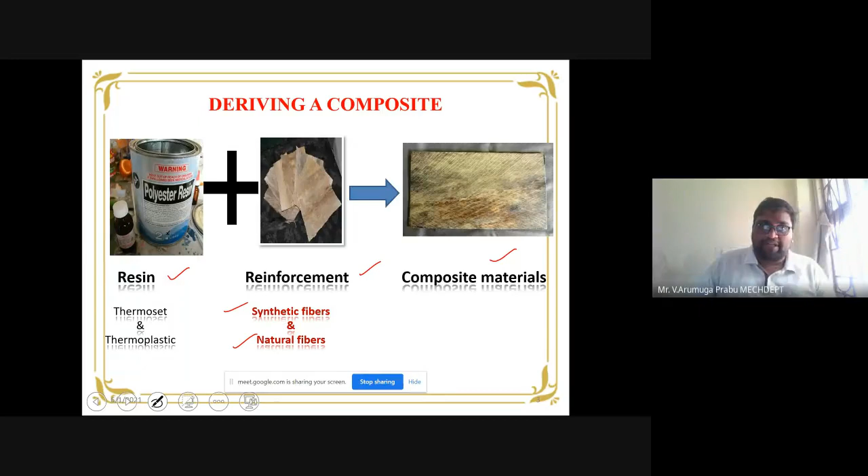So when we combine these two together, the output is your composite material, which should be in a plate form or whatever product form, according to the mold we are going to use and according to the application where we need it. So this is a brief introduction about how we derive composites.

Followed by that, the next one I would like to discuss with you is hybrid composites. So why do we go for hybrid composites? Since we all know composite is one or more, in the sense matrix and reinforcement. Now, as technology changes, as the day progresses, and as more research is evolving, the usage of hybrid composites comes into picture. What are hybrid composites? Here you are going to use two or more reinforcements instead of one reinforcement and one matrix. We go for using two reinforcements.

On the other hand, two matrices is not at all possible. There isn't enough research because of its chemical properties. Two matrices is a difficult task. But on the other hand, our research team focuses on mixing fillers with the matrix in such a way that we are able to produce hybrid composites. The reason is: one matrix is there, one filler is there, and another one, the reinforcement, is there. So this is about your hybrid composites.

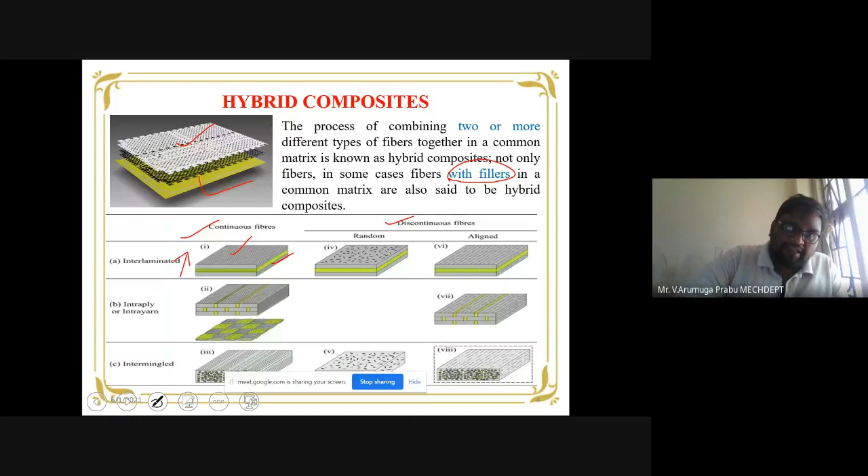In the case of the second type, intraply, you see the yellow color scattered here and there. If you see, you are able to notice the yellow color here and there. So that's your next type of arrangement making the hybrid composite. See the next picture, it should be well understood.

Then the third one is the intermingled. If you notice the intermingled type, what is happening is the two types of fibers are scatteredly arranged, they are intermingled together like this. So this is the way the continuous fibers are arranged.

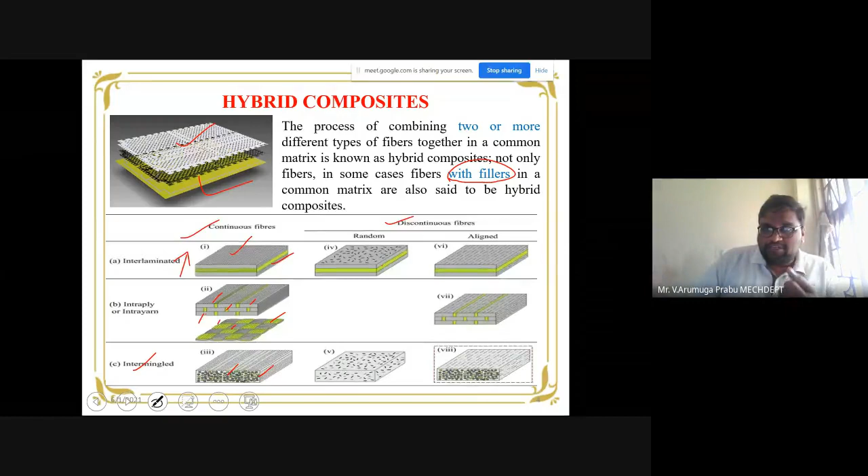In such a manner, the discontinuous fibers are arranged either in a random way or aligned way as shown in the pictures. So this is a brief introduction about hybrid composites, how we can prepare hybrid composites in different arrangements, as clearly shown in the pictures.

Now, why do we need hybrid composites? Of course this question will arise in all our minds. Automatically composites will reach the peak, and more sectors are using composites. Why specifically do we go for composites, and why do we go for fillers? It gives the answers for that also - why we go for using fillers for making some advanced, interesting composites.

The first reason is a general thing, the cost factor. High material cost is there. We go for merging one or more fibers, or fiber with filler, or matrix with filler. This automatically gives some excellent output properties, enhancement in properties. If you use filler as a material which is available by nature itself, there is no cost involved. In such a way, instead of spending high material cost, with very low cost we are able to produce some good, interesting, advanced composites.

That's the first reason. The second reason is the low installation cost. There is no special setup you are going to introduce for making your hybrid composites, so the installation is zero ultimately. That's another advantage where we go for the hybrid composite.

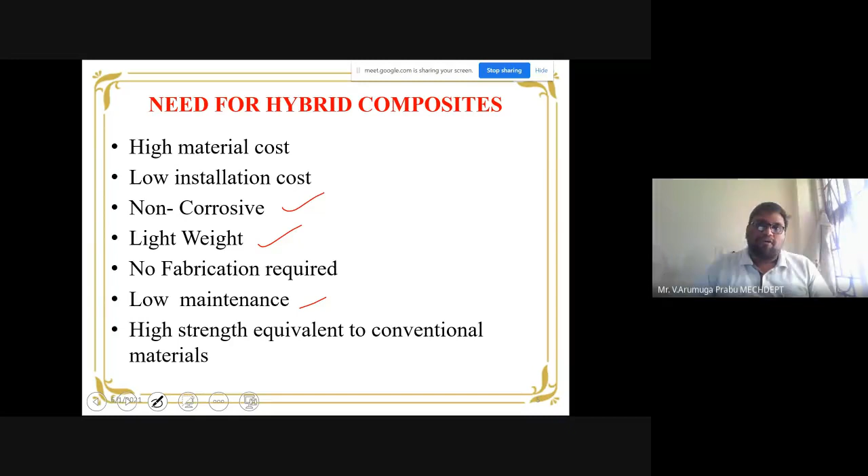And the ultimate highlighting point based on which we go for the hybrid composite is the high strength equivalent to our existing conventional materials. So these are all the major reasons based on which we go for the usage of hybrid composites. Let me move on to the discussion about a few examples.

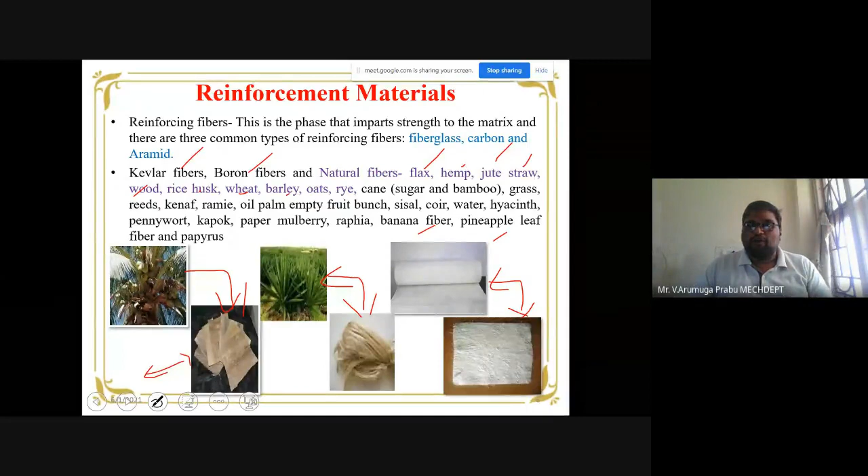So this is about the various reinforcement and matrix materials we are using in manufacturing advanced composites. Now, the next one I am going to focus on is about the major fillers which we are going to use to produce our advanced composite materials.

And this rice husk is the waste produced during the processing of rice. And the fly ash, of course, you all are aware about fly ash. In all the industries, while burning, fly ash is generated in more number.

Then the third one is the red mud. This is an interesting waste. Myself and my professor Udaykumar, we completed one sponsored project based on this red mud utilization only. That is, what is this red mud? It is an exclusive waste generated during the production of aluminum, that is, it is the waste coming out from the aluminum industry.

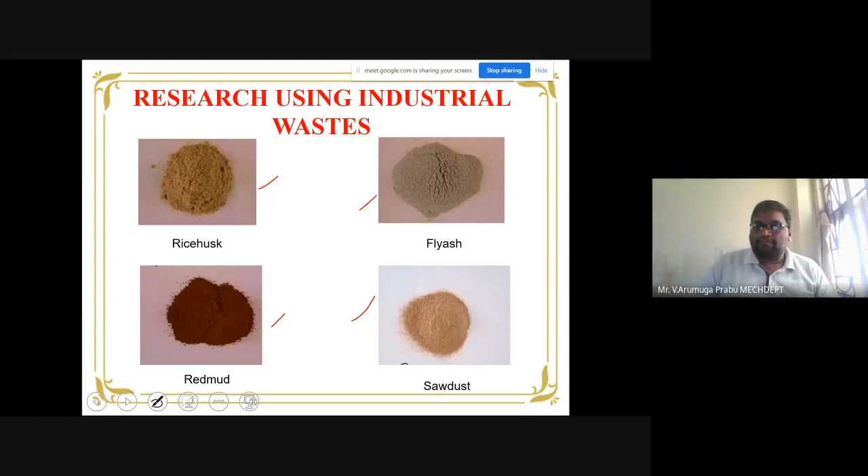So this waste we are using as a filler, that is, we are going to recycle it, and from this we are producing some innovative composites with excellent properties. Then finally, sawdust, which is also another waste generated during the processing of wood for making doors, windows, and other panels. So these four major ways we take as a filler, and some interesting results they produce during composite manufacturing that I would like to discuss with you in my coming slides.

So first of all, how we prepare the composite: we just take the polymer matrix, because this type of filler has the capability to bind only with the polymer matrix, not with metal or ceramic. You can try, because without trying we can't say anything. You can try in such a manner that your metal or ceramic should be in the powder form, because as I shown in my previous slide, all these are in fine powder form. So you have to collectively mix it together and go for some advanced powder metallurgy technology that I am not familiar with. If you are familiarized in that area, you can try that also.

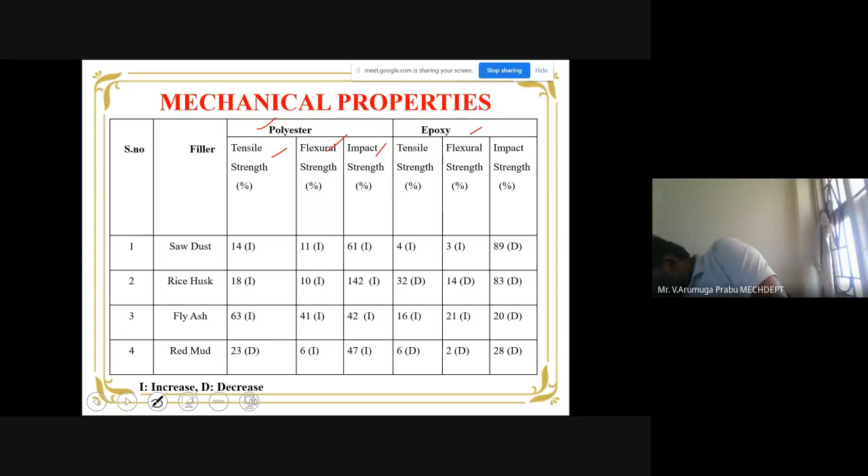As a mechanical engineer background, we carry out mechanical property studies, mainly including tensile strength, flexural strength, and impact strength. We take two polymer families to see how the wastes and fillers behave. Both families belong to the polymer family, and within that, two waste types are taken: one is polyester, another is epoxy.

The interesting results obtained are tabulated here. The 'I' indicates increase, and all values are in percentage, showing increase and decrease in strength. In the case of sawdust waste, both polyester and epoxy show a considerable increase in all strength measures except one particular case. In all other cases, we see 14% increase, 11% increase, 61% increase. So in polyester, all show an increasing trend.

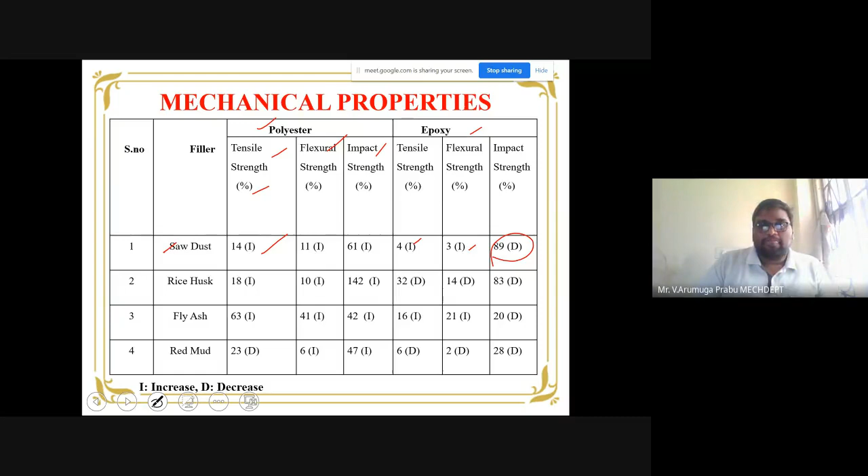If you see overall, collectively across all four wastes, you notice mostly increases. In this particular case, only a decrease—probably because they don't have enough capability to withstand the pulling force. On the other hand, in epoxy, most cases show increase, but decrease happens at a high rate. So this waste is not very compatible with epoxy, since we notice a drastic decrease in mechanical properties, exclusively tensile, flexural, and impact.

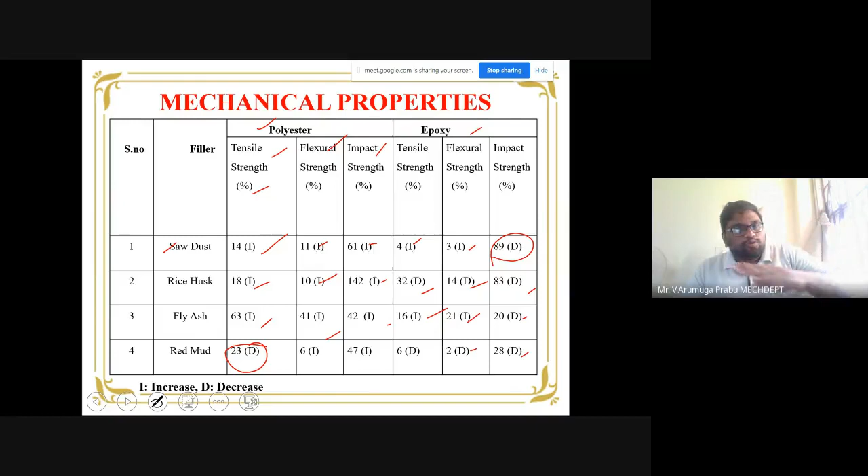So compared to polyester, epoxy is not well compatible with the industrial waste fillers. On the other hand, polyester shows increase in all strength measures—fly ash, rice husk, and sawdust all show increase in weight percentage across tensile, flexural, and impact. Only in the case of red mud do we notice that non-uniform distribution of fillers produces a decrease in tensile strength, because the fillers accumulate in one particular region.

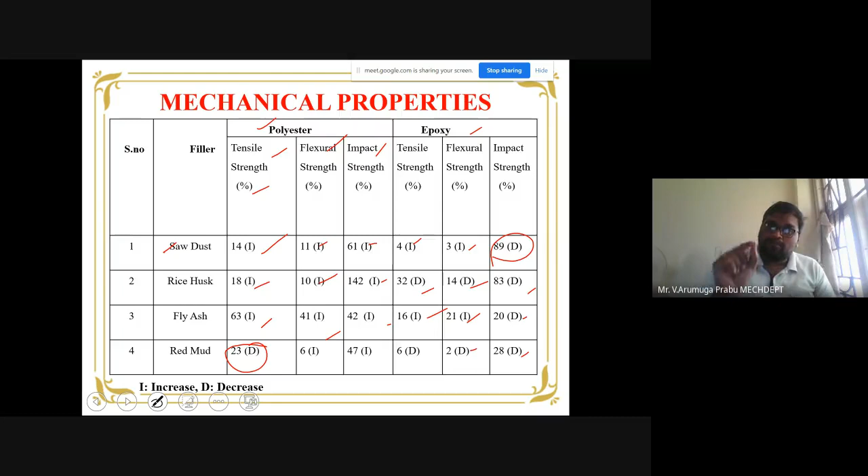Here, your filler is the reinforcement. As I pointed out earlier, the main purpose of reinforcement is to give additional strength to the matrix. So if the filler occupies one particular position, the matrix simply remains in one area and doesn't get strengthened. That's what happens because of non-uniform distribution, which results in the decrease we noticed in that particular case. Other than that, we notice an interesting increase in strength.

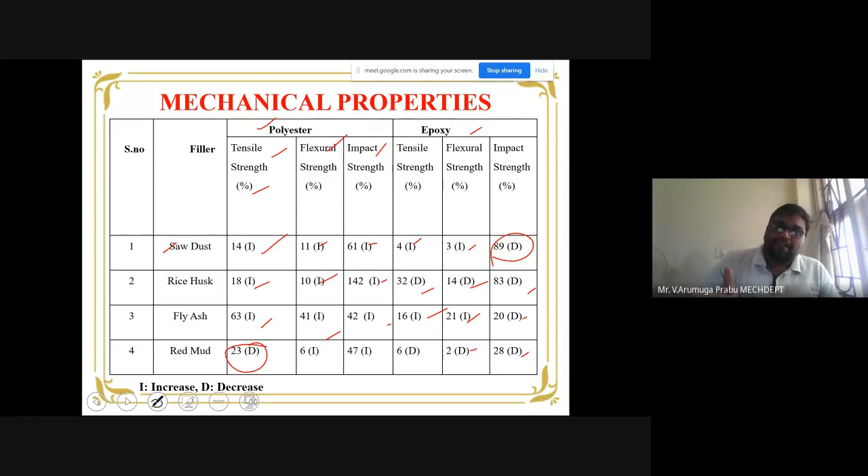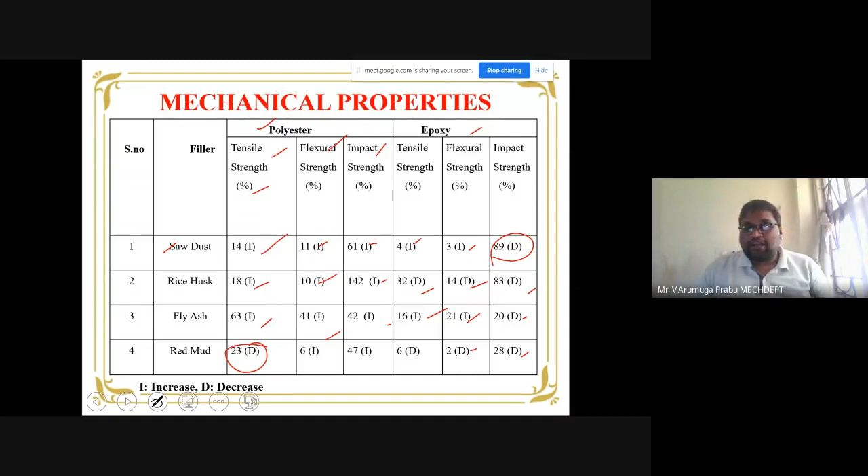So these results are purely for the filler and matrix—filler as reinforcement, matrix being polyester and epoxy. Now, let me move on to discussing the case studies: a few examples of how advanced composites are manufactured and how they behave with respect to the usage of fillers, especially industrial waste fillers. Let me show you case study 1.

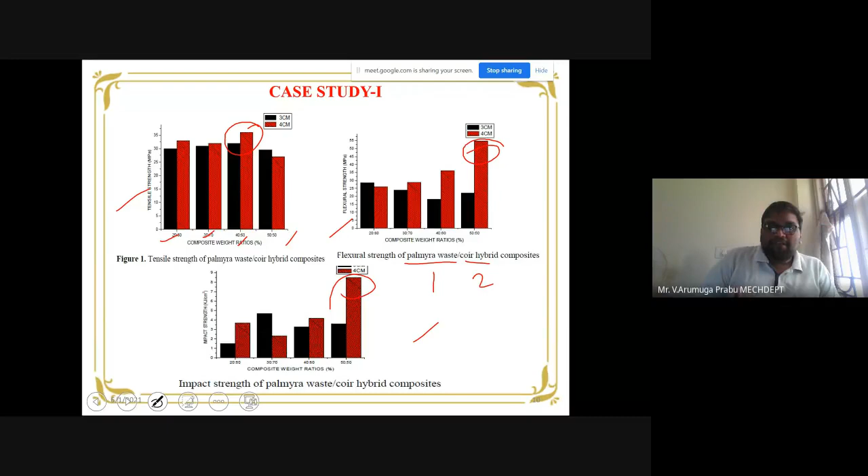Flexural and impact, 50 is to 50 is the weight percentage which possesses enhancement in results. On the other hand, for tensile strength, the 50-50 comes as the last one. Only 40 is to 60 is having the highest value. This again may be due to the incorporation of Palmyra waste and coir in such a way that we are not able to obtain the final product in a proper uniform manner, so that high strength is effective there. So this is one case study.

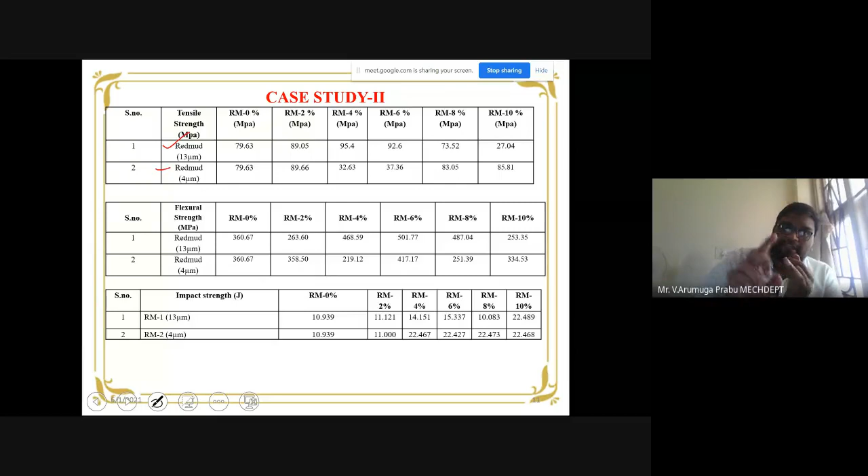In case study 2, I am going to discuss the behavior of hybrid composites prepared using fiber, then filler. The filler is the industrial waste red mud, as mentioned in the table. Then followed by that, the matrix is the unsaturated polyester. Here we just vary the weight percentage of the industrial waste red mud filler from 2 to 10 only.

Why such a low weight percentage is selected? The reason is, during my initial studies and iterations, we are able to notice that higher addition of weight percentage will decrease the strength. So we turned our research focus towards development of advanced composites using low weight red mud percentage that varies from 2 to 10.

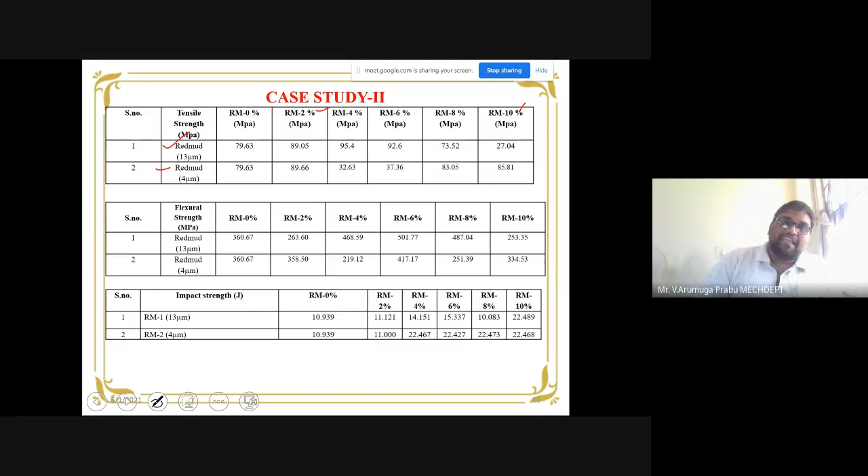That is the reason why nowadays nano composites are creating a huge impact, because the nano composite size is in microns or nanometers, which gives a better surface dispersion. If the surface dispersion is more, then automatically we are able to obtain more fine results. That is evident from many researchers' work. Because of this reason, we choose this small range particle size that I would like to highlight here.

And of course you notice the strength. This is the one without the filler, where the percentage is 0, with strength 79.63. If you take the other cases, the increase in strength is noted except in the case of red mud 8 and 10. So you see that the increase in weight percentage is going to decrease the strength. That's why we choose the range between 2 to 10.

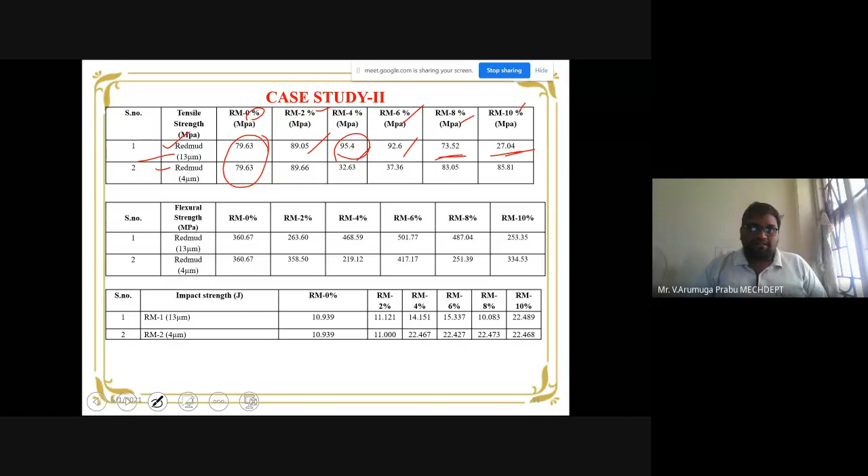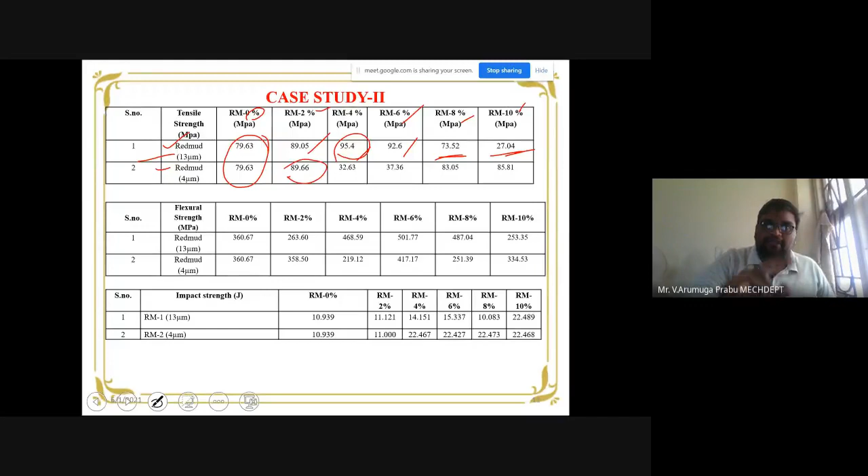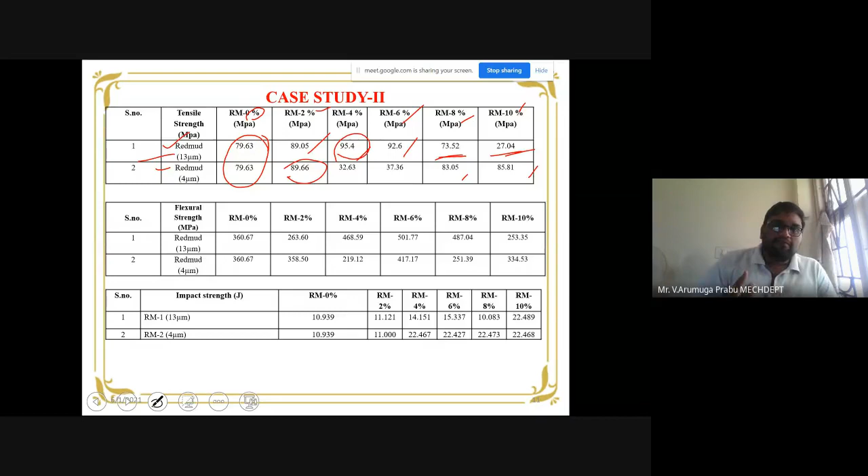Among the combinations, the 4 weight percentage possesses better results, in the case of red mud particle size 13. If you vary the particle size of the filler, that will also create a huge impact on your strength. That 4 micrometer particle size gives the highest strength of 89, for the 2% only. Remaining all percentages get decreased, and it is slightly increased for 8 and 10. The reason may be due to the occupancy of the red mud dispersion.

Then followed by that, the flexural strength also behaves in such a manner, and the impact strength results are also shown in the table. So from these results, what I would like to conclude and insist strongly is the...

addition of the red mud filler along with the natural fiber and polyester resin will produce an increase in the mechanical property, that is an increase in the tensile strength, flexural strength and impact strength.

Just for that, I will take one example. I will change the color to green. Now please note the green color marking. This case, 92, and the next case among all, this is the highest one.

501.77. Then here, this case among all, this is the highest one. Nearly 22 is the highest. You can take anything; this is almost the highest one.

So if you see, when compared to 0 in all cases, now compare the 0 in all cases. While comparing, it is going to produce a much better improvement in this strength. So the 0% is only your fiber and matrix combination results.

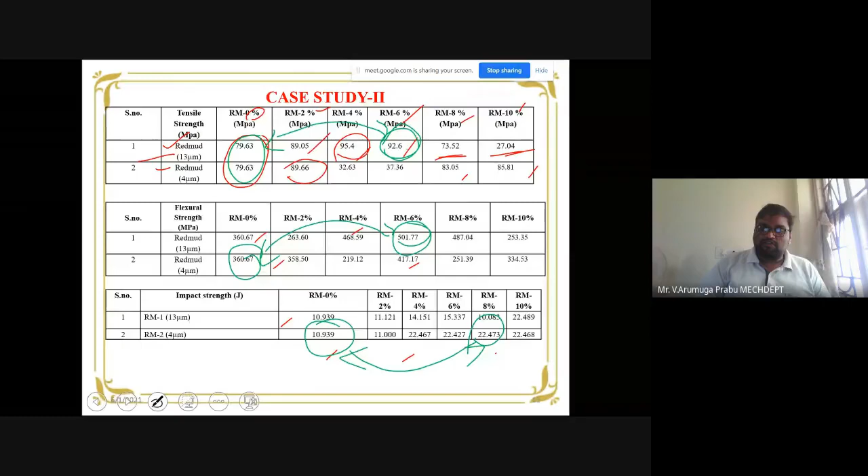On the other hand, if we include a secondary reinforcement for producing the hybrid composites, the enhancement of strength is noticed in all the cases, that is tensile, flexural and impact properties.

So this concept is going to produce a huge impact in the case of your polymer matrix, where enormous, exhaustive research is done using polymer matrix in the hybridizations.

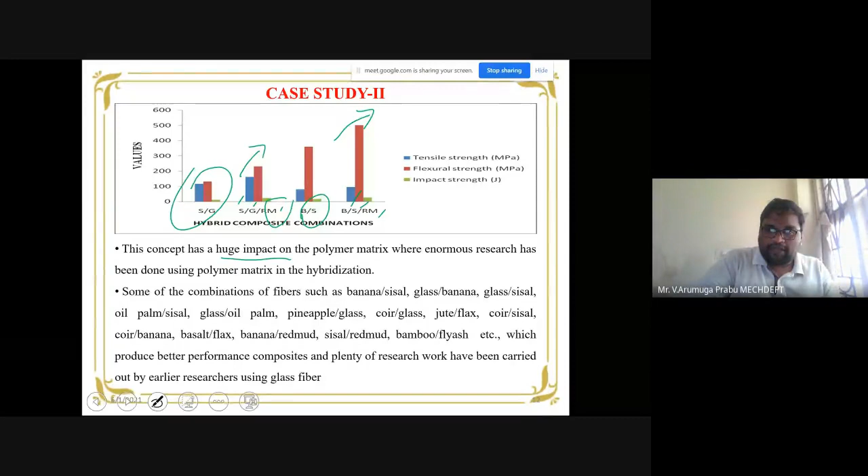And you can select any one of the combinations mentioned in the slide - banana sisal, glass sisal, glass banana, or oil palm sisal. These are some interesting combinations: pineapple glass, coir glass, jute flax, sisal red mud, bamboo fly ash.

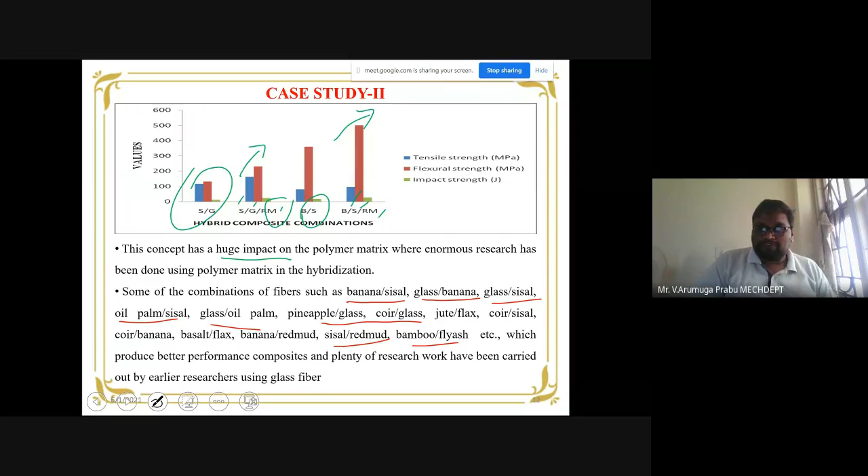Likewise, all these kinds of hybrid composites are produced, which give better performing composites, and a lot of work has been reported earlier by many researchers, especially for the hybrid concept, using glass fiber - that I would like to highlight to you.

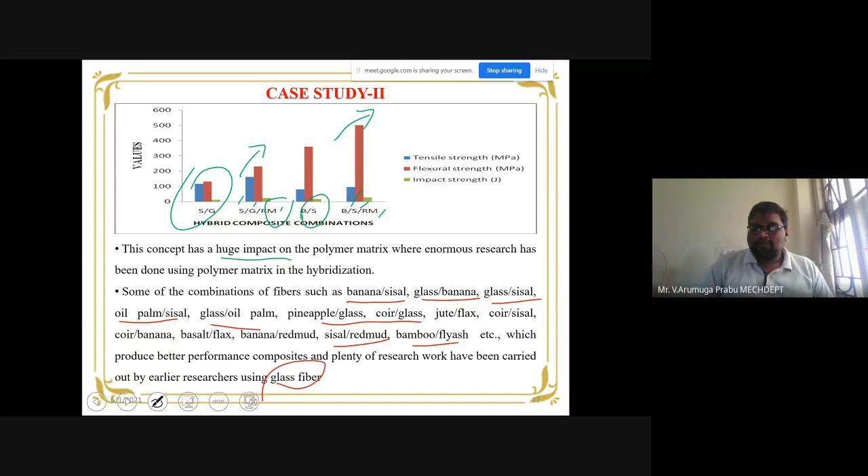So with this, I am concluding the first part of my presentation, and as I pointed out in the beginning slide, let me move on to the discussion of the last half.

The second half of my presentation is about another interesting type of filler, that is about biochar.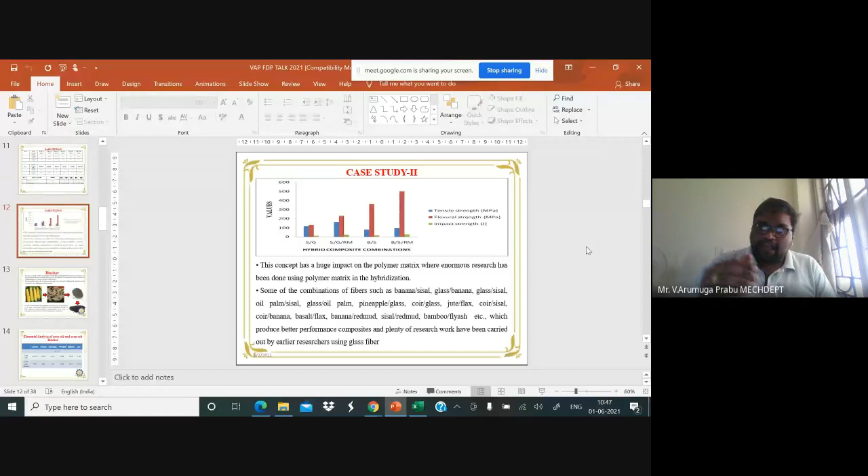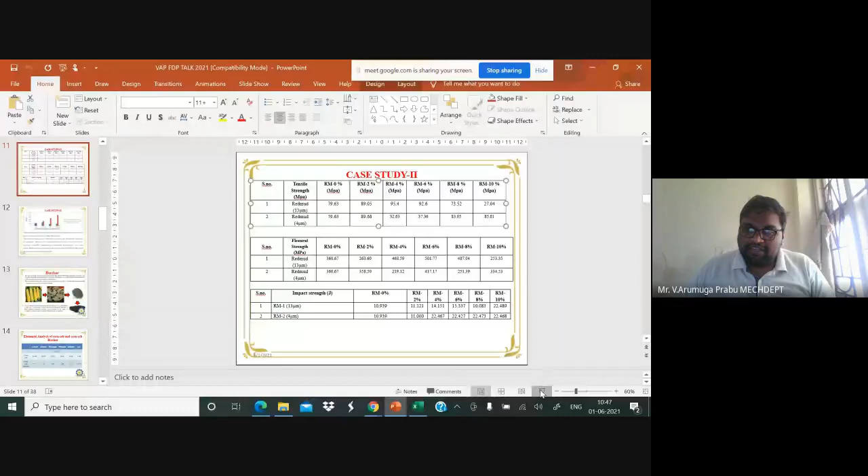That is the matrix, and the fillers are 10%. We vary the natural fiber weight percentage, sir - that is sisal and glass we varied. As I mentioned earlier in the slide, here we keep the matrix and fiber percentage constant, and we vary the filler weight percentage. In my previous case, I mentioned that is 20:80, varying the two fiber weight percentages and keeping the matrix weight percentage constant and fixed, sir.

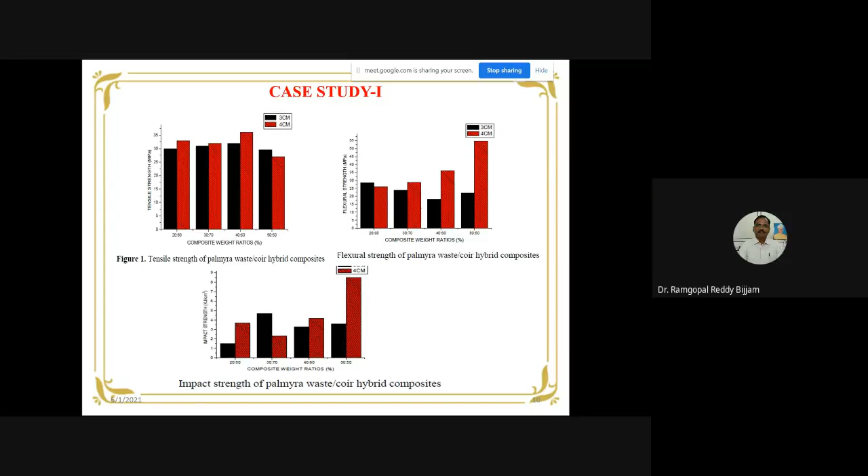Sir, if you are varying two fibers in case of hybrid reinforcement, so simultaneously varying both fibers' volume fractions, what happens? Which one affects the strength, and due to which fiber are you getting more strength? How can you say?

That's another good point. I would like to insist here that for the main reason, initially we take, for example, sisal as 30%, then banana fiber as the remaining 70%, so 30 is to 70. In that 30:70 combination, we study the mechanical properties. Now we keep this 30:70 ratio fixed, and we add the filler reinforcement along with that.

Already, based on the pure sisal and pure banana results, we have data, so based on those results only we are able to compare. Apart from that, as you pointed out, we are not able to identify exclusively which one is affecting when we vary the combination. Along with that, if you go for characterization studies using scanning electron microscopy or other advanced studies, you are able to differentiate the presence of the two fibers. Based on that also, you can identify, because one fiber is in mat form and another in short fiber form, you can identify easily based on characterization studies. That will help you more effectively.

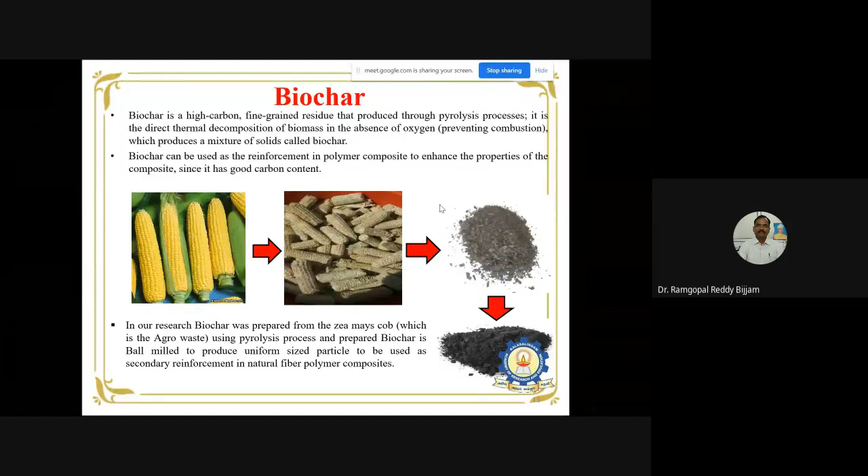Okay sir, one more doubt. When you are using red mud, tensile strength increases up to some 6% or 4%, whereas if you use 8%, the tensile strength decreases. Why does it decrease? Is there any reason?

Yes sir, the main reason is related to the manufacturing technique - we prepared the red mud based polymer composite using the solution dispersion technique. This is simply like the hand layup method: I have a glass mold, and in the glass mold I pour my polymer, either polyester or epoxy. Then the red mud, which is in powder form, I put into the polyester or epoxy matrix and do manual stirring.

So the reason is due to this manufacturing technique. Because of the manual stirring, proper distribution of red mud is not achieved, and also since I am pouring manually, the distribution of red mud tends to accumulate in one particular place, occupying the corners. That's one of the major reasons we identified for the variation in strength. To avoid this kind of defect, instead of manual stirring we should go for mechanical stirring, which will provide a very good uniform distribution and mixing of the red mud with the polyester matrix. That's the major reason we identified.

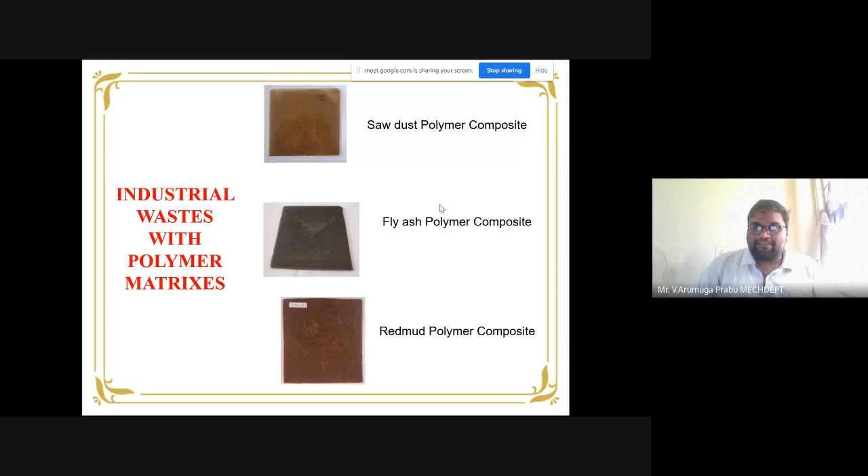Okay, now let me move on to the discussion on my last topic quickly. This is about biochar, another interesting type of filler we have been working on more recently - for the past 2 to 3 years, my research team has been doing research in this area. What is biochar? It is also prepared from waste, obtained when the waste is subjected to the pyrolysis process.

Okay, what do you mean by pyrolysis process? In the sense, here during the pyrolysis process, the thermal decomposition of biomass we are going to do in the absence of oxygen. That is, there is no oxygen present. You are going to put your waste inside a container, and in the container, the waste is subjected to burning.

In such a way that absence of oxygen is ensured. This kind of biochar produced will have an excellent capability in that it has good content of carbon, and if there is a presence of carbon, it will enhance the properties of your composites drastically, especially along with your polymer matrices.

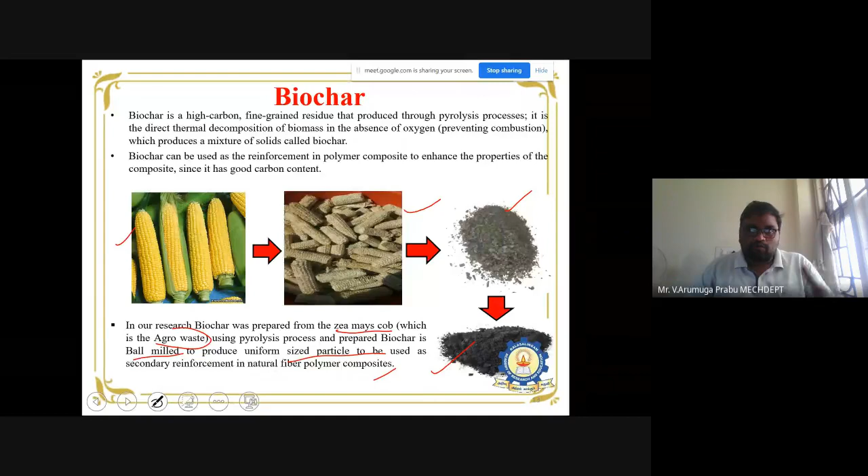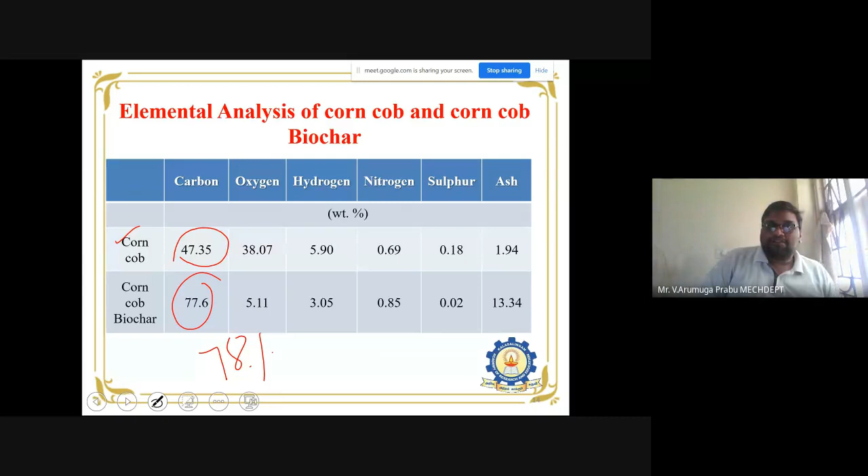This is the elemental analysis, and the interesting thing is the composition present in your biochar. Your ordinary waste corn cob has a carbon percentage of 47, whereas the biochar obtained from these corn cobs by means of the pyrolysis process has a very high carbon content of nearly 78 percent, which will make this corn cob biochar an effective reinforcement for making some advanced composites. Because as we all know, carbon provides the highest strength. If the carbon content is there, it surely produces the highest strength.

So this is how we are producing the biochar. The source is corn waste, and the pyrolysis temperature normally should vary from 300 to 700. You can take 500, you can take 300, depending on your waste material, because 700 is suitable for corn cob. In some cases 700 will not produce your biochar, so depending on the material, the temperature will vary from 300 to 700.

The duration of burning is normally 3 hours in a closed confined environment with complete absence of oxygen. After the content is obtained, it is subjected to ball milling, normally in the ratio of 1:15 to obtain a smooth fine powder form. The ball mill speed and hours duration also vary depending on your material.

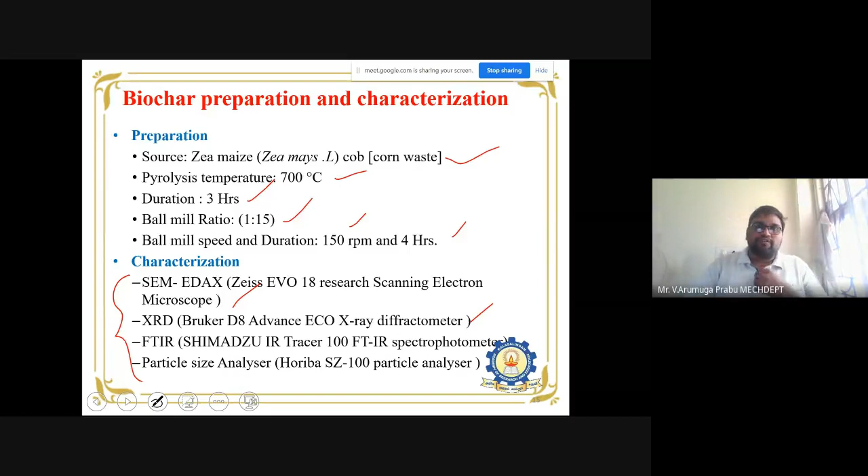After the biochar is prepared, it is subjected to various characterization studies to understand the composition elements present in the biochar. For that, normally you can go for SEM, EDAX, XRD, FTIR studies, as well as particle size analyzer to know the size of your biochar. All those things you are able to understand by means of this characterization study.

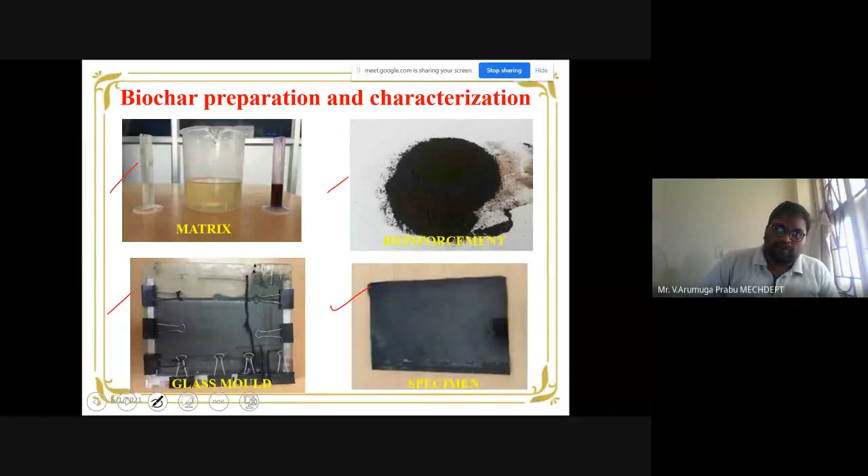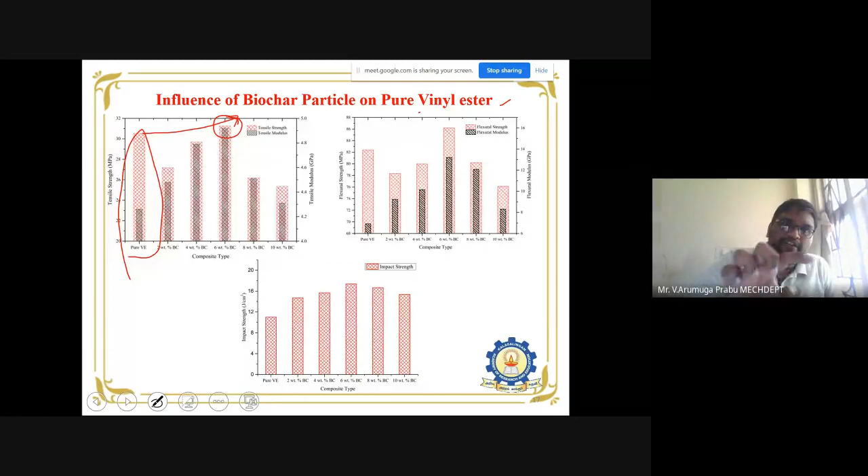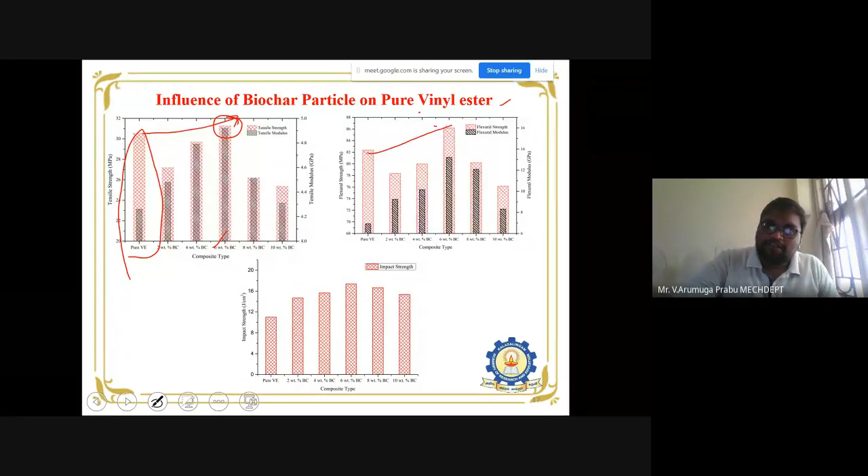Compared to pure vinyl ester, the addition of biochar produces an enhancement in results at the 6 weight percentage. All other weight percentages show a decrease in strength. If you notice, at 6 weight percentage in every case, the enhancement in strength is observed. So among all combinations, 6 weight percentage biochar possesses excellent mechanical properties compared with pure vinyl ester.

This is a proper example of a composite. You must ensure that when matrix and reinforcement combine, it produces an increase in strength at some point — only then is it called a composite, showing improvement in results. When combining the two always produces a decrease in strength, there's no use calling that an effective composite.

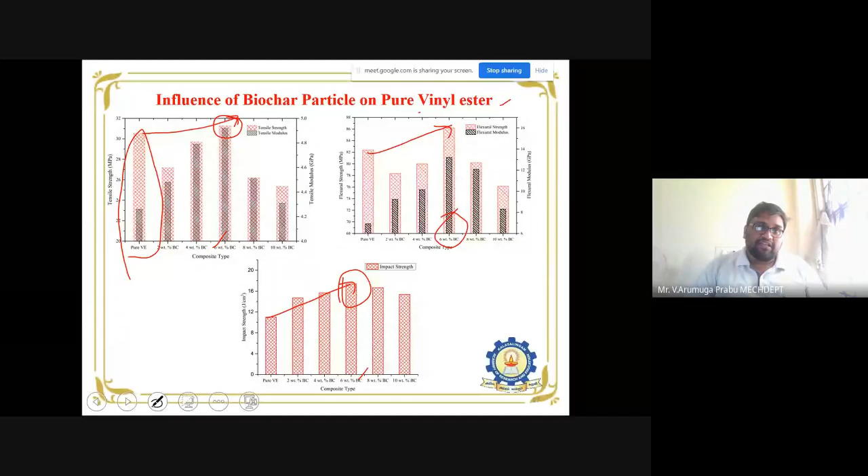So these are the results I wanted to share. Following these interesting results obtained using vinyl ester and biochar alone, we now move on to mixing the biochar along with natural fiber to see how it behaves.

Here the natural fiber we have chosen is Sansevieria cylindrica fiber, and some of its special properties are mentioned here: high strength to weight ratio, high creep resistance, high tensile strength, good toughness, and much higher wear resistance than metals, along with good corrosion resistance. It's also not affected by temperature change, unlike most natural fibers which deform due to temperature change — that's not the case with Sansevieria cylindrica.

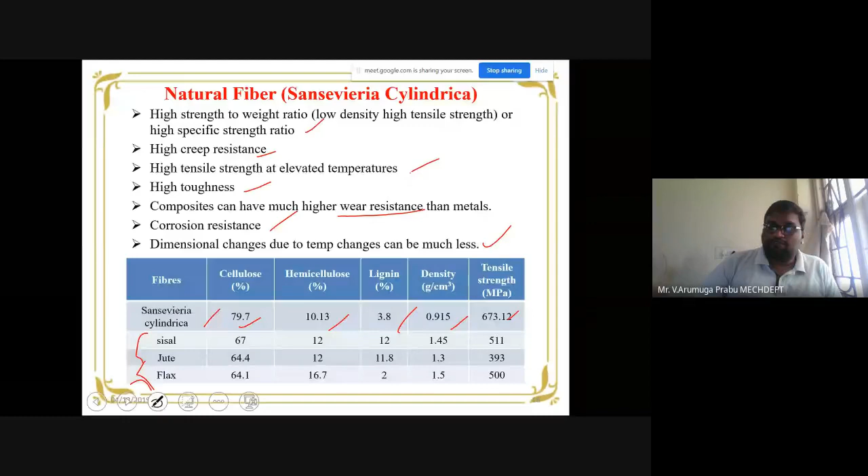So this shows the combination of how Sansevieria cylindrica possesses good properties, and how its composition compares well with other natural fibers like sisal. Sansevieria cylindrica is also used as a decorative plant. And this is the summary.

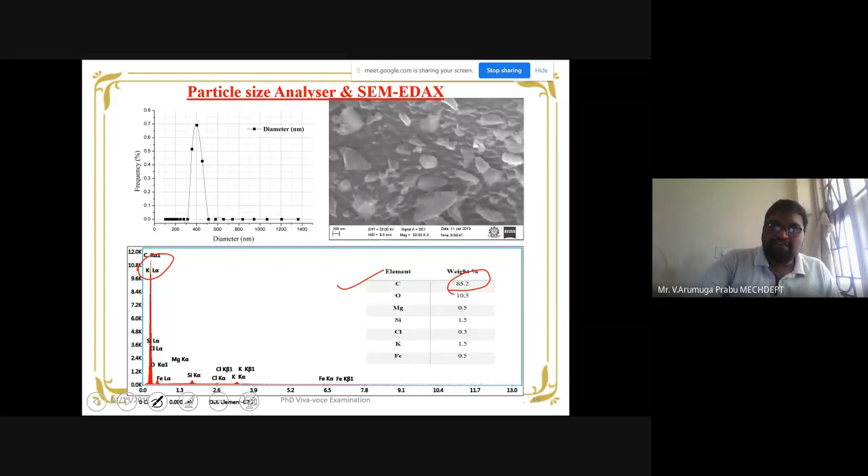I'll quickly go through this to clarify the composition present. Here you see the elemental composition of the biochar — 85% carbon content is there, which is very good, and the peak also indicates the same. This is an image of the biochar showing its presence.

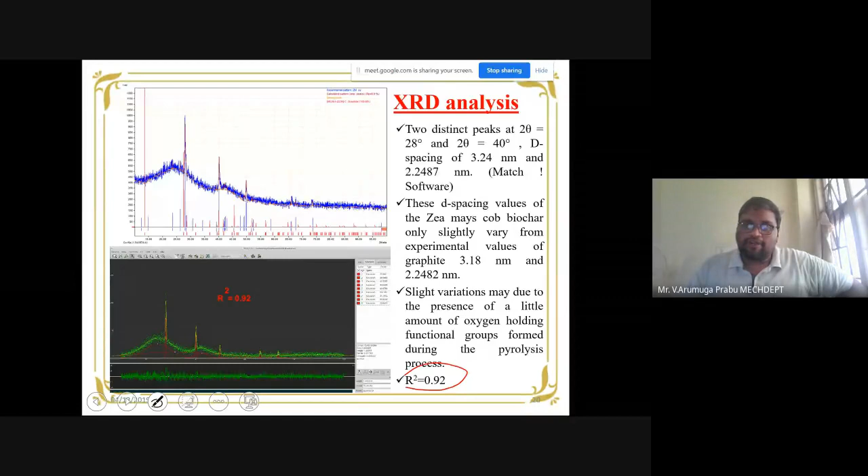This is the XRD analysis we carried out, and by means of the R value we obtained, we are able to confirm the presence of high carbon. To ensure the presence of high carbon, we carried out this XRD analysis as well as the FTIR test.

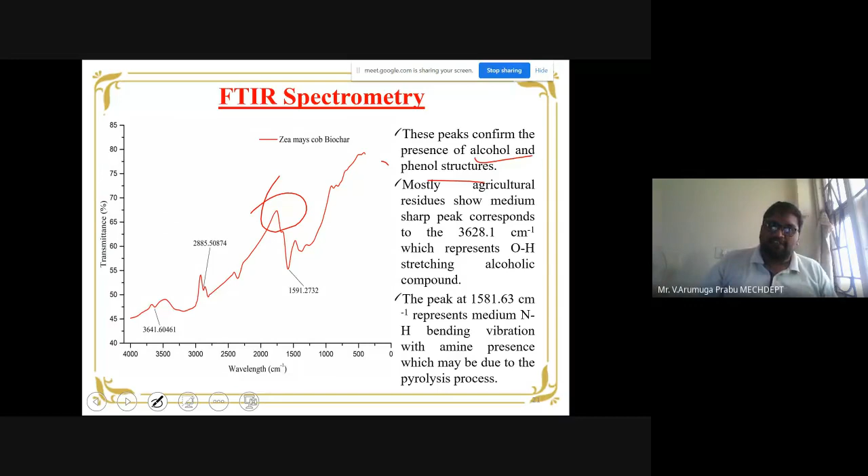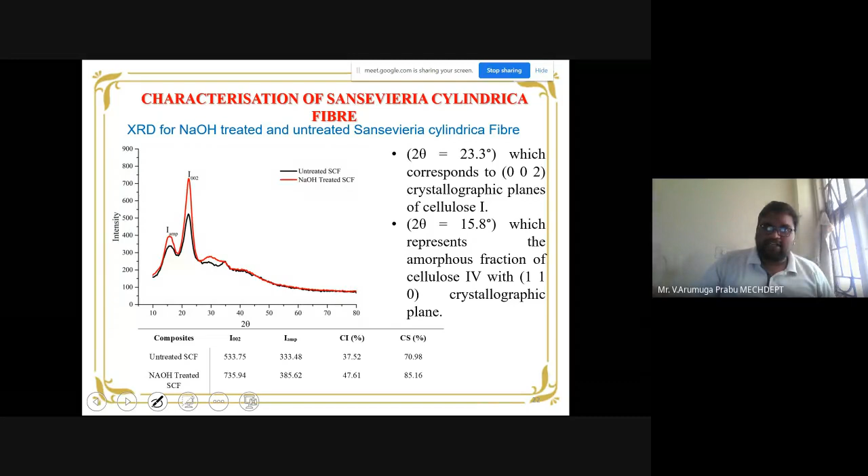This is the XRD for the treated fiber, the NaOH and silane treated fiber.

Let me further explore my discussion on this topic, which is about the mechanical properties of the biochar-filled Sansevieria cylindrica composite — that's the short form.

As we pointed out earlier, here again the 6 weight percentage composites show interesting results. The results are very high in the case of the 6 weight percentage biochar-added Sansevieria fiber composites, which contain the natural fiber, compared with the 0% sample without biochar addition.

Only Sansevieria fiber and the vinyl ester. Its strength is nearly around 45, equivalent to 45 megapascal.

On the other hand, the addition of biochar, especially 6%, see how much it increased the tensile strength. It touches up to nearly 75.

So that much high strength the addition of biochar yields. On the other hand, at higher weight percentage, the strength gets decreased, which is ultimately evident from the graph shown here. This is about the tensile behavior, how biochar behaves regarding the tensile strength.

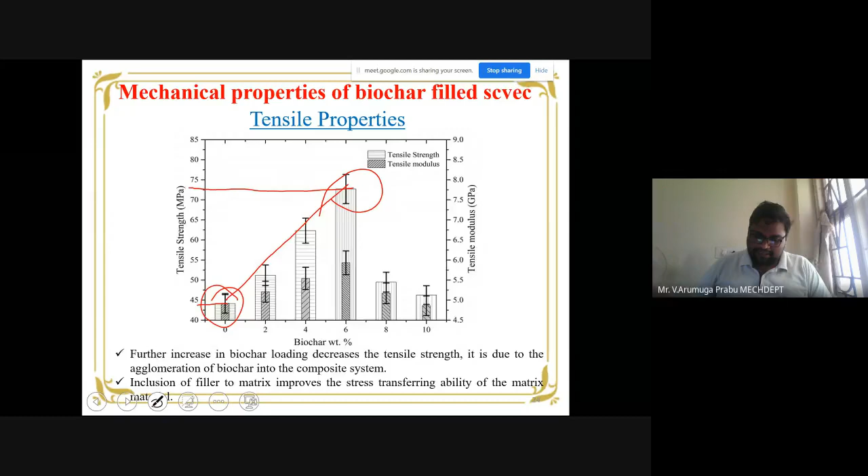Now let me move on to the discussion about the next one, that is the flexural. These are the supporting evidences of how the strength is improved and decreased, as I pointed out, with the help of some characterization studies. I am able to monitor clearly and represent in a detailed manner at which weight percentage the strength is changing.

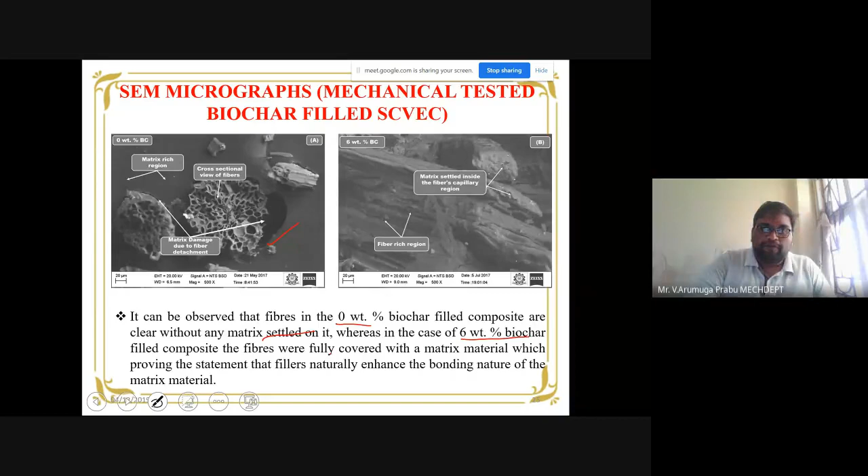The first image shows the 0 weight percentage biochar, where there is no matrix settled, as is evident. On the other hand, at 6 weight percentage biochar, the fibers are fully covered with the matrix material, so the fillers hold strongly here, giving a good bonding nature. Because of this good bonding, ultimately the strength gets improved a lot.

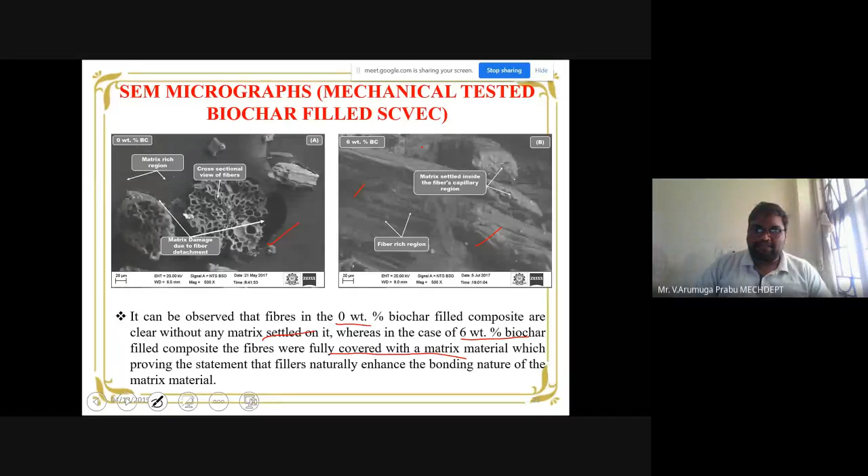That's the reason. Then in the flexural also, the same thing - see the increase again at 6 weight percentage addition of biochar. The good mechanical strength is obtained because of the high porous nature of the biochar, which is another important speciality, and it plays a vital role in achieving good mechanical strength, such that we are able to attain enhanced mechanical strength in all the cases.

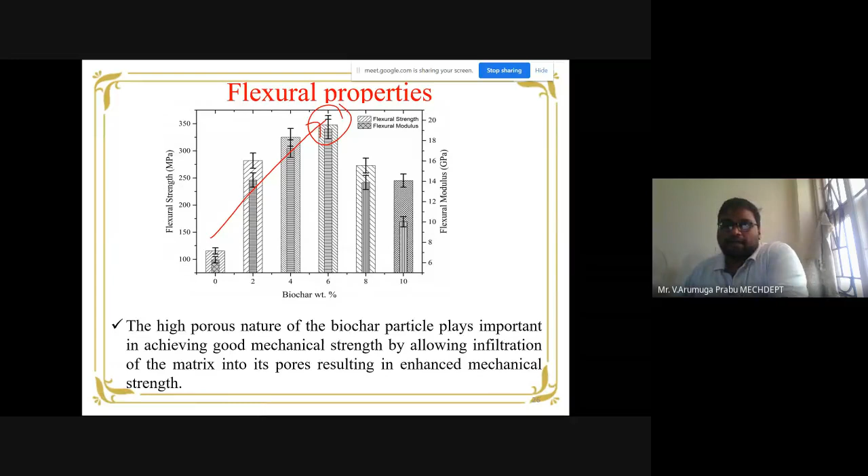So that's the one thing I would like to highlight regarding the flexural properties. Then, followed by that, again a few SEM images, where here also the 6 weight percentage is shown - this is the 6 weight percentage addition of biochar.

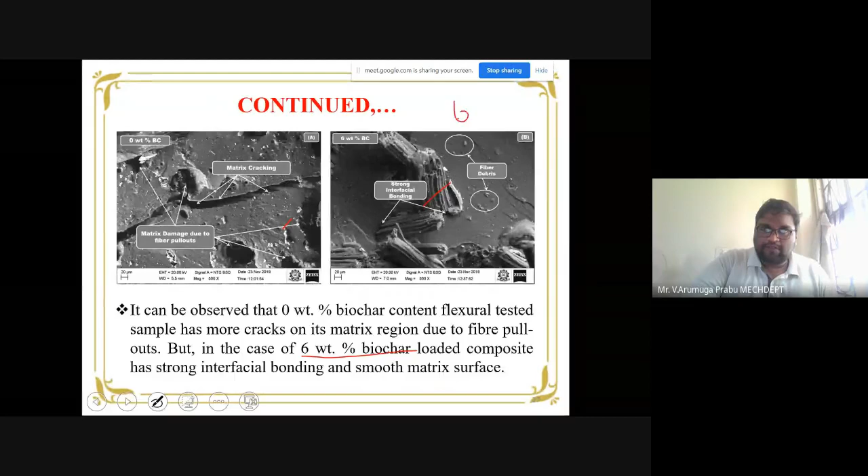This SEM image is taken for the fractured specimen, and I am going to notice the fractured portion alone, how the fracture takes place. By doing some extensive microscopy studies at the fractured surface, I am able to notice whether the matrix gets debonded or fractured, whether the fiber gets fractured, whether the filler gets collapsed - everything we are able to notice clearly with the help of scanning electron microscopy studies.

In these scanning electron microscopy studies, I am able to notice that 6 weight percentage biochar has a strong interfacial bonding between the matrix and the filler, that will automatically hold strongly such that the fracture gets avoided, the failure gets avoided, which is evident from the same image.

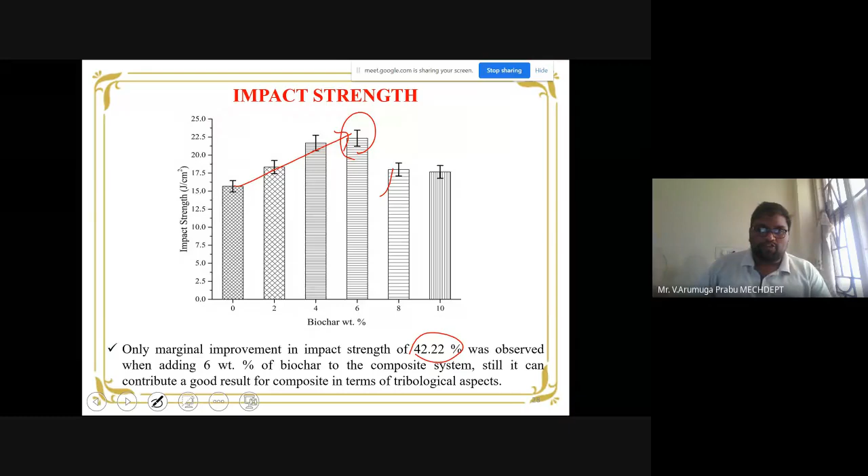Again, same case - at 6 weight percentage, the impact strength touches the peak, and the increase is about 42% higher than the one without biochar. With that, the mechanical properties discussion is over.

So the mechanical performance is improved a lot by using biochar filler along with natural fibers for producing some advanced composites. In the same way, another two or three properties I'm going to highlight quickly - the first one is about the erosive behavior.

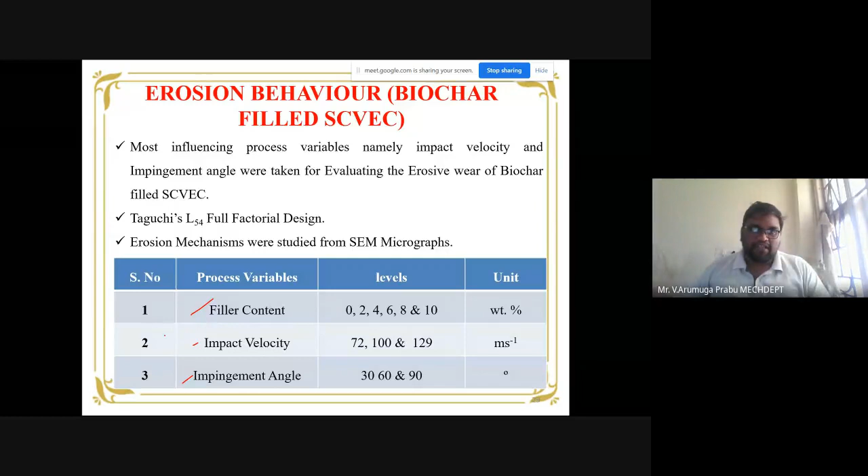This is one interesting property that recent studies on composites are focusing on - the erosive performance of polymer matrix composites. The erosion studies are carried out using a special setup called an erosion test rig. In that, the three variables which we can vary and study the composite performance are the filler content, the impact velocity, and the impingement angle. Now these are all the variations.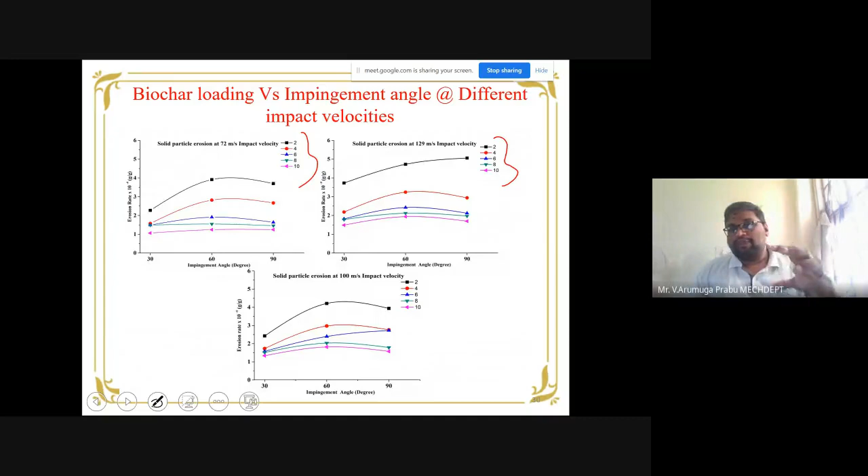Here it is not the 6 weight percentage, it is the 10 weight percentage. Because of going to a higher weight percentage, the erosion resistance is also high. So this is for the 10 weight percentage biochar. The next property we studied for the biochar-based Sansevieria cylindrica composites is the water absorption test.

Moisture absorption studies are carried out with a main focus on understanding the moisture resistant capability of the developed composites, and the moisture resistance is evident from simple calculations based on finding the diffusion and permeability coefficient.

How am I ensuring this? If you see the table, D is the diffusion coefficient, P is the permeability value. These two formulas are available and already used by many researchers. We followed that and studied to find the moisture absorption resistance. By means of D and P values, we are able to notice how the composite behaves in terms of moisture resistance.

The coefficient increases for the case of 6 weight percentage. So from 2 to 6, the values are in an increasing trend. If you notice the table, after that there is a decline - around 1.9, then it starts declining from 8 to 10 percentage. Both these parameters start falling mainly due to the excess concentration of biochar, which starts absorbing more water.

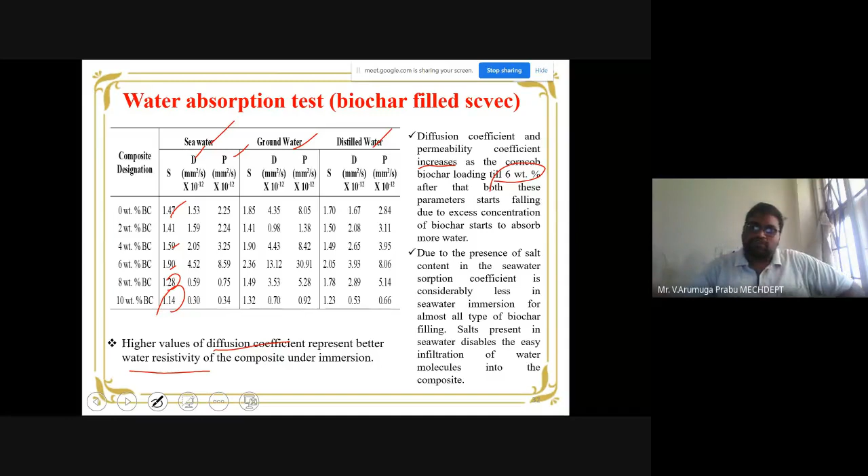The last test I would like to discuss for another 2-3 minutes is the chemical resistance test. We subjected the prepared biochar-based natural fiber composites to acids, alkalines, and solvents, both taken in two numbers. Two acids were taken, as noted in the table: HCl, hydrochloric acid, and HNO3, nitric acid. Then alkalines taken were sodium hydroxide and Na2CO3, followed by two solvents, toluene and benzene.

So these are all the various acids, alkalines, and solvents we have chosen to carry out the chemical resistance test.

Interestingly, what we note is that the addition of biochar-based composites shows a weight gain in all the cases, meaning it has the capability to absorb the chemical. A weight gain is noted in all cases, which clearly indicates that the composite is not going to lose any weight, as was the case in our erosion studies. So similar to the erosion studies, here the composite does not lose any weight, which is an interesting phenomenon.

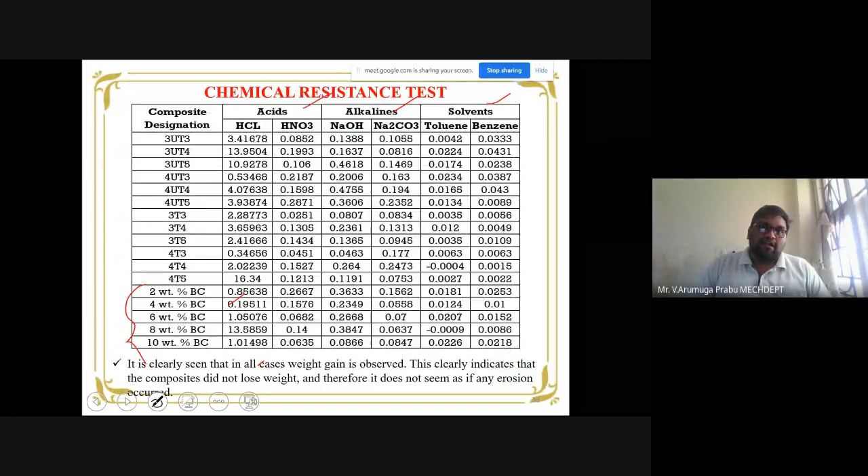With this, let me move on to summarize the things I've discussed right now about the biochar, as well as my starting discussion. I'll start my summary with the most recent topic we discussed, the biochar.

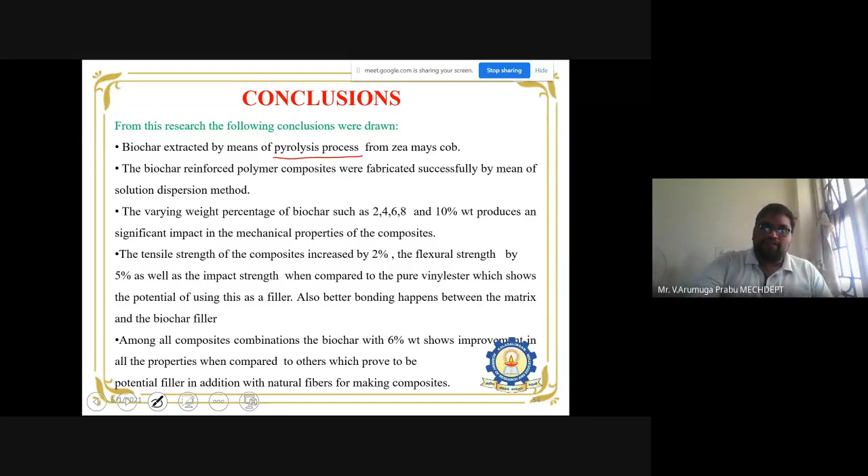Biochar is extracted purely by the pyrolysis process, and the example shown here is extraction from maize cob. It is manufactured successfully by the solution dispersion method I pointed out, and the weight percentage taken varies from 2 to 10 percent.

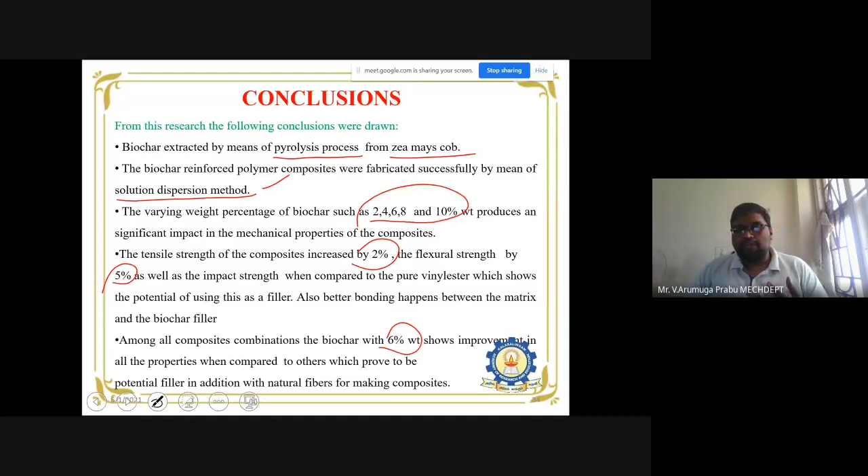The interesting thing we noticed, as pointed earlier, is an increase in tensile strength by 2 percent and flexural strength by 5 percent when compared with pure vinyl ester. Among all the composite combinations we prepared, exclusively the 6 percentage weight addition of biochar shows excellent results, proving it to be a potential filler in addition with other natural fibers for making advanced composites.

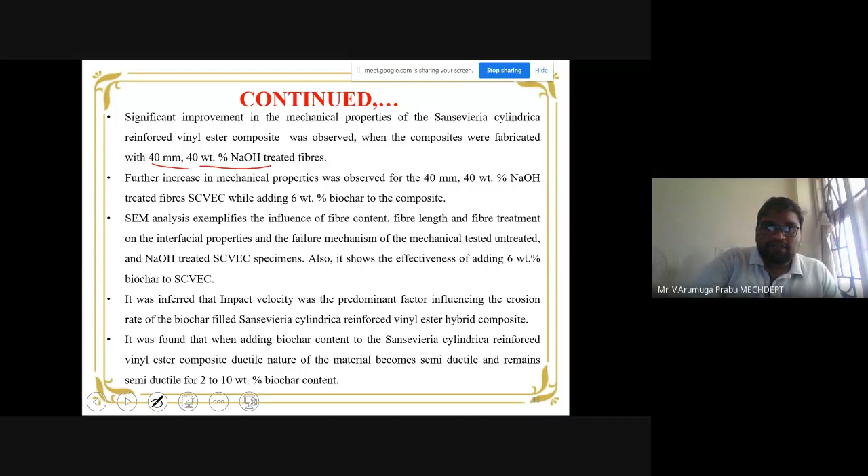The next point I'd like to highlight in my summary is regarding improvement. When we use biochar in the natural fiber, the better case where some good enhancement in strength is noted is for 40mm, 40 percentage NaOH treated fibers. In this case, 6 weight percentage of biochar along with the 40mm 40 percentage treatment possesses better mechanical properties, where the influence of fiber content, fiber length, and fiber treatment on the properties was also noticed and analyzed in detail.

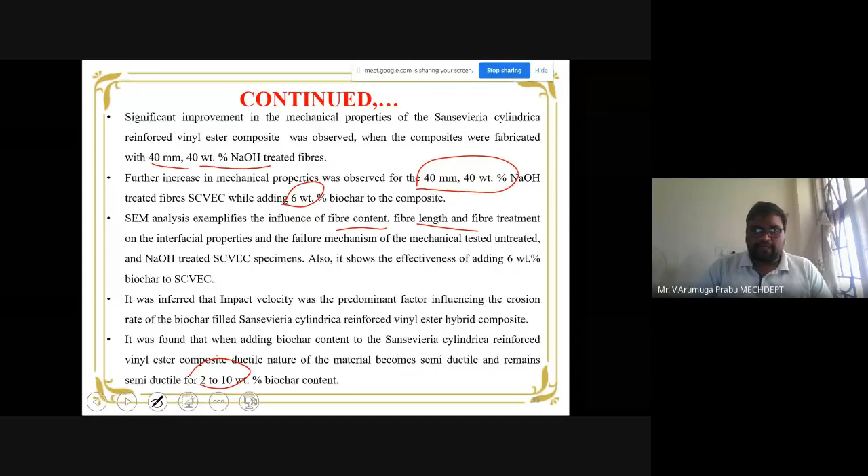Also, this is the erosion behavior I highlighted earlier. It changes from ductile to semi-ductile behavior by the addition of 2 to 10 weight percentage. The erosion resistance is about 68 percentage, and with the help of scanning electron microscopic studies, you are able to justify the improvement in strength.

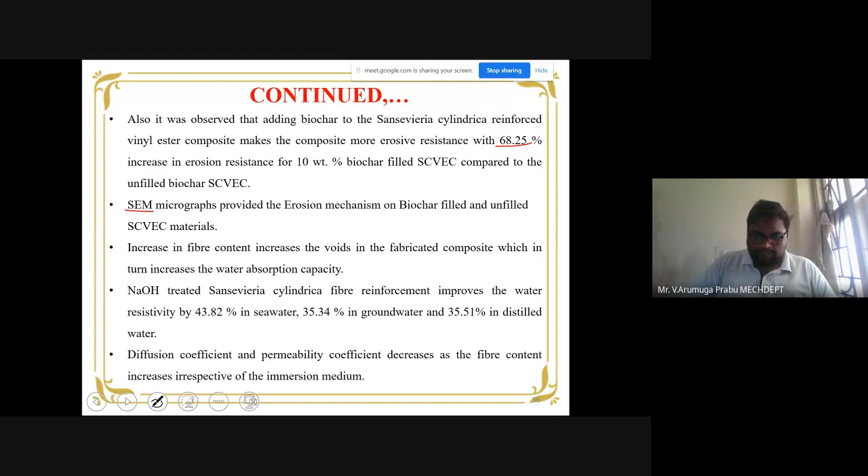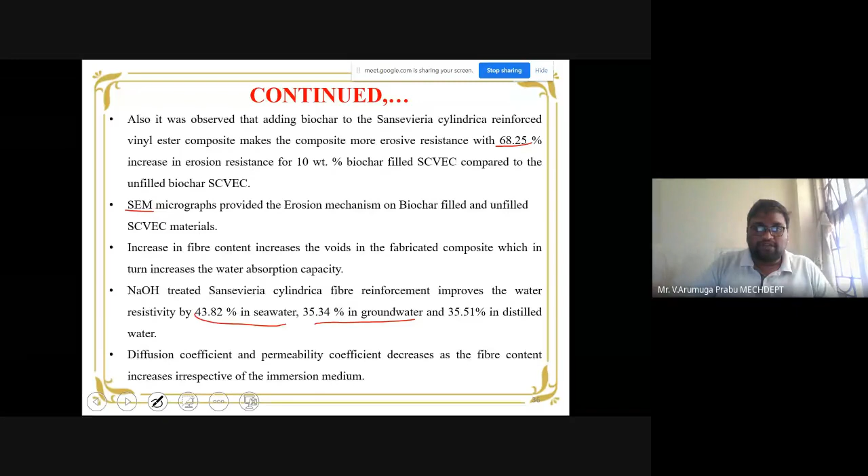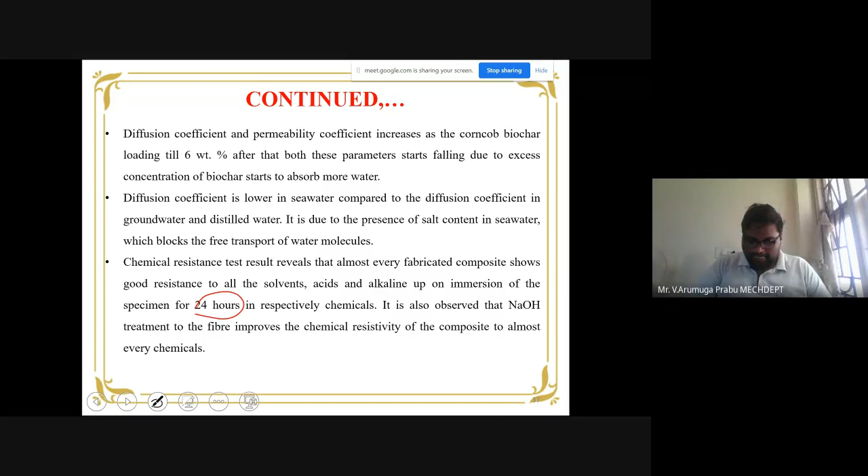So with this, let me conclude my today's talk about the importance of fillers in advanced composite manufacturing.